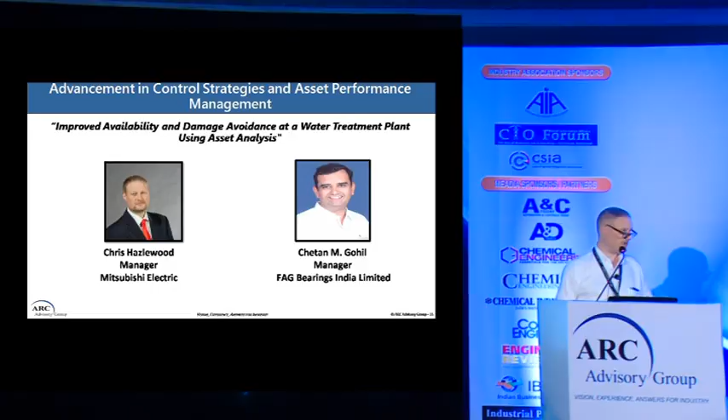So basically, I'm very happy to be here in India. This is the second conference I've attended here. And I have to say, it's one of the most well attended with delegates. So it's a pleasure to be here and to see so many good faces. So let's see if I can work the magic.

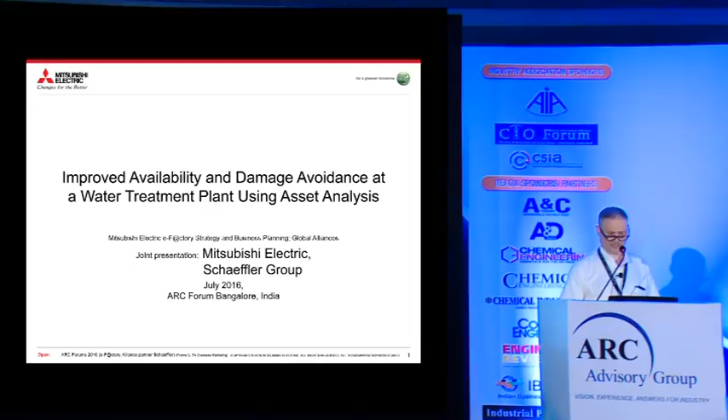Basically, you know probably the name of Mitsubishi. It's famous for cars and Bank of Tokyo and many different things. But Mitsubishi Electric is a specialist in electrical and electronics manufacture. We were established in 1921, and we have a turnover of about 4 trillion yen. So that's quite a bit.

So I want to talk to you, actually this is really nicely following on to the ABB presentation, about what happens when it all goes wrong. When it's been a bad day and you've got your head in your hands and oh no, what's happened? Probably something like this has happened to all of you, or at least your plant managers, when the machine has just stopped working.

And maybe a few minutes before, you had some smoke coming out of the machine, and a few days before that, somebody noticed the machine was getting a little bit warm, but nobody did anything. A little bit sad, really. A while before that, there might have been some noise. You might have heard some strange knocking noise or some squealing where there's a lack of lubrication in the system, and you're thinking, oh, I'll fix that later. But it's already too late.

But actually, you had a warning signal even before then. Way, way back, even weeks and months before, you would have had some invisible warning signs, vibrations. The machine started to do something it shouldn't have. And why was that? Because something you didn't see went wrong with the machine. Because before then, everything was happy. Machine was running great. Production was fantastic.

CMS, Condition Monitoring System. These have been around for a long time, but all this Industry 4.0, IIoT, have actually made CMS become something much more powerful than before. Because we're able to actually bring data in context with the situation and start to understand a little bit more about the real information that we're seeing.

So what kind of inputs come into the CMS system? Well, we have some reactive inputs. We could look at, for example, how many production items we made. So we know something's going to wear out after producing a certain number of items. It could be we're drilling holes with a drill. After 100 holes, we know that the drill is beginning to wear, and the accuracy of the hole is no longer reliable.

It could be that actually we could look at the machine process data for more live information. If we looked at the current on the motor that's driving the drill bit, and we start to see the current increase, we know the drill bit is probably beginning to wear. So we now have two pieces of data we could put together and start to build a picture.

There are, of course, some external factors, such as environmental data, things that are not necessarily under 100% of our control. Temperature, humidity, other factors that we might need to consider. And we have some expert systems, such as a vibration monitor or thermography, or some of these other more high-tech ways of looking at things.

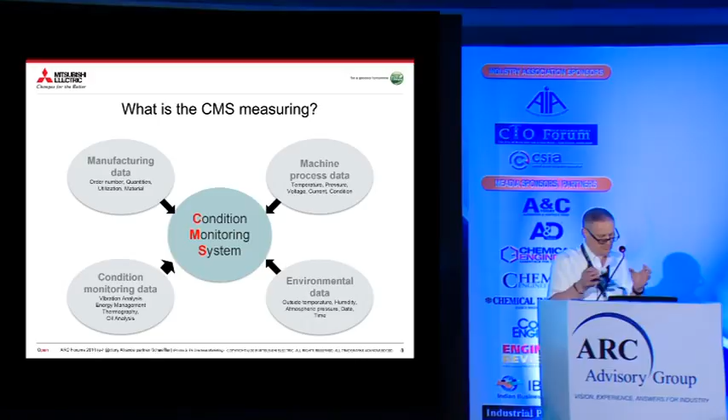So we put all this data together, and we need a way of collecting it and bringing it into a way that we can analyze it and interpret it. So we need an infrastructure. We need a layer of agents and connectivity. Could be networks, it could be just looking at data sets, many different ways, depending on the inputs. So with our classic factory automation, we can be looking with a field bus or with Ethernet. With condition monitoring systems, we may be able to pull data wirelessly, or we may have dedicated protocols to talk.

And we have databases we can pull data sets from and look back over history and see what happened before. There was a mention again in the ABB presentation about experts and historical knowledge. We have stored experts and historical knowledge. And we have that environmental data. We know, for example, with an injection molding machine, we need a longer cooling time if the environmental temperature is higher. So we know our production rate will be slightly slower.

So once we got all the data together, we actually need to put it somewhere. So we put it into a database. And some people say that database is a cloud, and that cloud is remote, or it could be local, or it could be on a machine. Frankly, it doesn't matter. It's a place where you consolidate information, and you review it, and you get answers from it. So that's a basic architecture, a basic overview. It's a preview to what we're going to hear from Schaeffler.

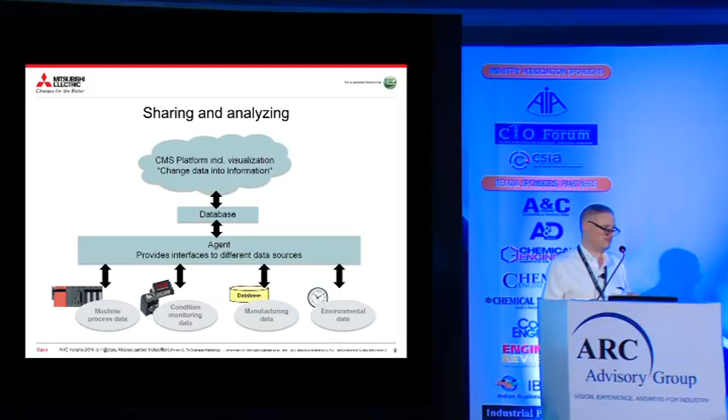We're going to look at 3 different case studies, because one of the things that concerns us is that whenever we hear the discussion of IoT, Industry 4.0, everybody's thinking of big systems, big companies, with SAP, ERP management at the top. But actually, this is equally scalable and important for small companies as well, and small devices. So we're going to start with the first case study, which is actually a water treatment plant. And that water treatment plant is unmanned, and it just has 4 pumps. Very small. It's a device scenario.

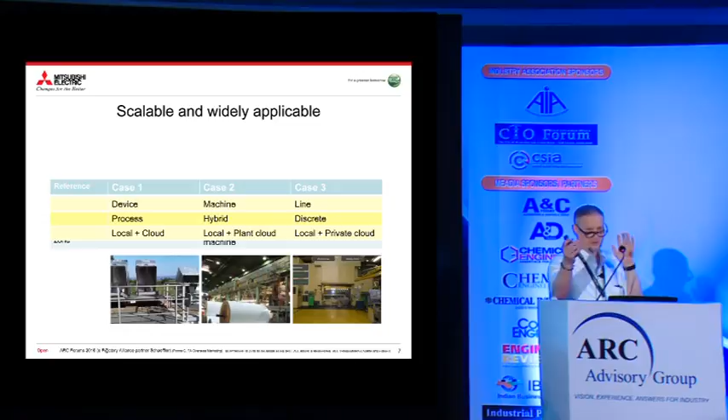The next we're going to look at is a paper mill. And this paper mill is a single machine, but it's huge, 4 stories tall. It's making paper on rolls which weigh about 9,000 kilograms. It's a single machine, but it's a big machine. And then we're going to look at actually a multinational. We're going to look at multi-site, pulling all data together, so completely scalable. And the other way we're going to look at this data is it's not limited to discrete manufacturing. It applies to process, it applies to hybrid, as well as discrete. So it's scalable in a different dimension.

And I wrote here local cloud, plant cloud, and private cloud, because I want you to understand that everything doesn't have to reside in the big WWW. You can still protect your data, you can still control your local information, but you can use those concepts. So I'm going to hand across to my friend Chetan from Schaeffler, who is actually an expert in vibration.

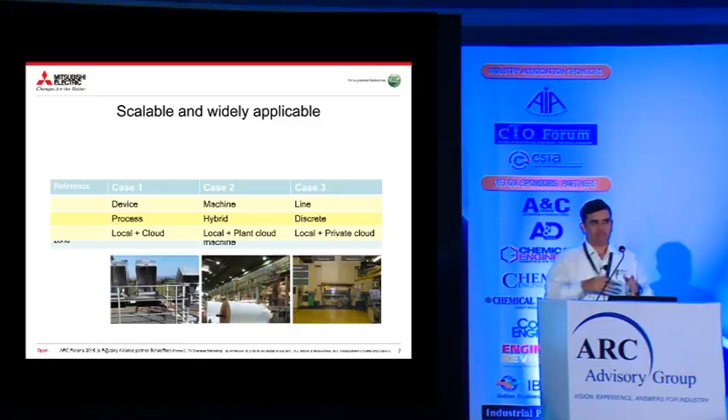So, as described by Mitsubishi, I am Chetan from Schaeffler Group, FAG Bearings. In the beginning of the presentation there was something about Mitsubishi e-Factory, and under that they have many partners, and one of the partners is Schaeffler Group. At Schaeffler Group we have a huge setup, huge understanding, competency for reliability. And after joining hands with Mitsubishi, it's now better and better. So in this forum, we selected 3 cases where, as explained by Chris, we are going to discuss how the condition monitoring will be useful.

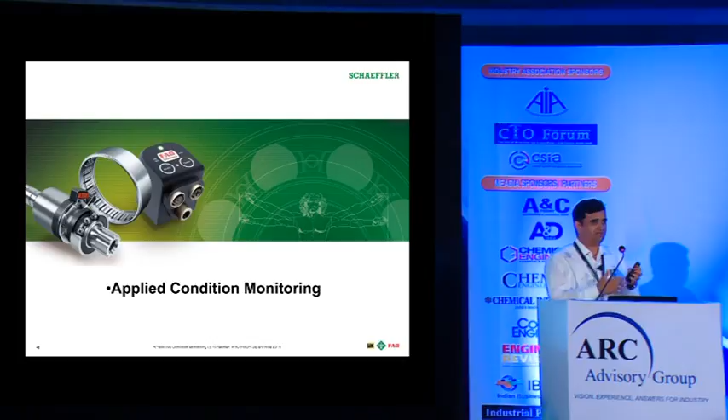So regarding applied condition monitoring, before I start discussing each case, I was just listening to the presentations, and I found 2-3 words very common in many of the presentations. These words are smart. It may be a smart sensor, smart machines. Then intelligent. Another word was connected, interconnected, and obviously cloud. So I am very happy to say that in our presentation many of these things are covered, and it is also mentioned how it is practically implemented in actual life.

So this is about my company, Schaeffler. FAG bearing is a part of Schaeffler, and we have many companies like you can see here, LuK, INA, FAG. These companies you may be familiar with. And in India, the industrial division of Schaeffler has a service unit where we are working on reliability engineering. So let us start with the first one, a wastewater treatment plant. The company is somewhere in Germany, in Rotenburg, and this company is processing water, and that wastewater treatment plant is unmanned because it's very small, and it's not possible that someone can be there permanently.

So here the equipment which was there is pumps. These are screw pumps which you can see over here. These screw pumps transfer slurry, I mean some water and something, from here up to this discharge point. And these screws are being driven by one geared motor, and it works 24/7 continuously. So when the history of this equipment was analyzed, it was going under breakdown with no fixed interval, sometimes within 1 year or sometimes within 3 years. So due to that, time-based maintenance or preventive maintenance was not possible, or rather it was not giving any good result.

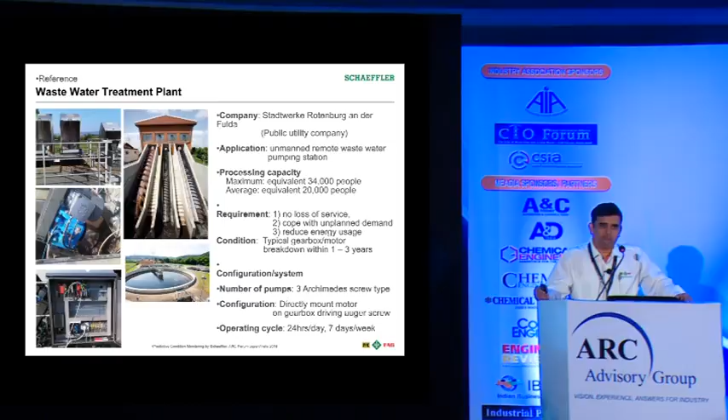If these pumps are not working, it will affect at least 20,000 people in the village. So to improve the reliability of the machine, we installed our sensors. It is Smart Check, FAG Smart Check.

Since this is a compact system, we put one Smart Check per machine. Likewise 3 Smart Checks were there, and all 3 were connected using Ethernet, and this Ethernet was further connected with a Mitsubishi controller and through internet.

This setup is at a field water processing plant, and from here the data are being sent to one central server or central monitoring system where the data are monitored, and in case of any abnormality, it triggers that something is going wrong.

Not only by using a computer, but it was possible to review the data using external devices like laptops or mobiles or any smart device, and we get the information.

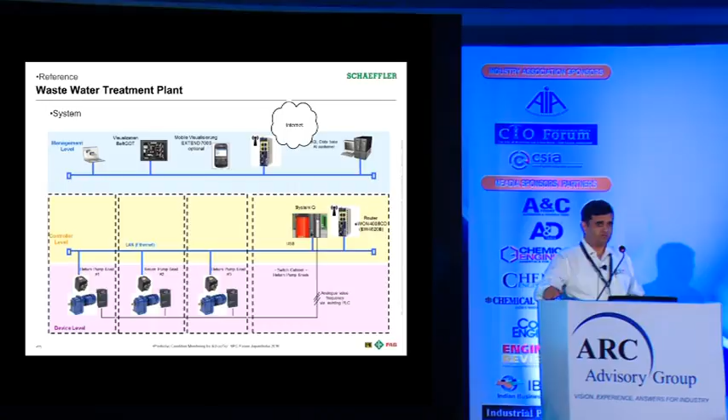After this, the reliability of the system was improved very much, and another thing is all investments are associated with ROI, that is return on investment.

That calculation was also carried out, and the actual scenario was: overall repair of the gearbox was taking at least 1,000 euros, and a new gearbox was 5,500 euros. The solution which was implemented had a cost of 5,700 euros.

So practically, if we avoid one failure or more than one failure, then we get a payback. Initially it was estimated that at least 1 year, or maybe 2 years, or sometimes 3 years, there should be an ROI.

The estimate was identifying more than 2 gearboxes, and if we avoid failure of 2 gearboxes, then the advantage is saving of 3,300 euros, and the main important thing is avoiding 2 failures of the gearbox, which affects 20,000 people.

When this system was installed, within 4 months one defect was identified. People went there, did the maintenance, and the condition was restored.

As Chris said, it's not such a big system with many complexities. It's a very simple system where a local network was created and data were pushed somewhere, and they were getting all the information about the machine.

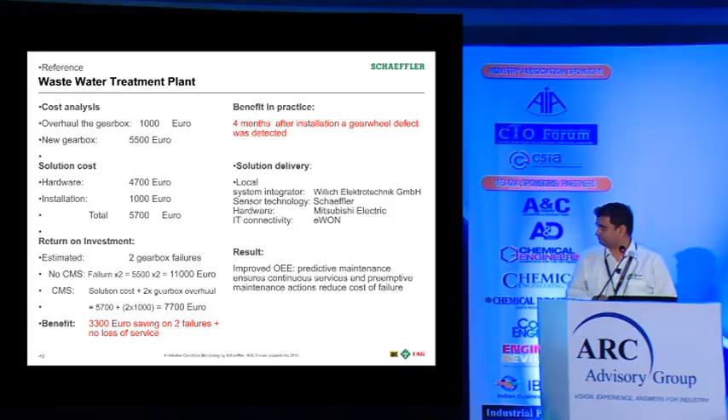This is the second case, regarding Mitsubishi HiTec Paper. This is a paper plant which has a speed of 1730 meters per minute, and this is really a very huge speed. If you convert this into speed, it is 103.8 kilometers per hour.

So you can imagine one high speed car is moving - at this speed, paper is moving in the plant. Since this is a longer high speed, the dryer section of the plant will be longer.

This is about the plant, and here you can see a picture with these people, and it's a 4-story plant. Just to give you understanding of how big the system is and where it will be useful - the target was a total of 26 fans.

Out of 26 fans, 13 are blowers, and the rest 13 were extractors. So these were pushing the air, and the other 13 were taking the air and sending it off.

Here also, if you see, in case of breakdown of any fan or blower, the paper will not be able to get dried to the required level, and that will give stoppage to production, and sometimes the entire paper roll will go into scrap. So it's a big loss of money as well as production opportunity.

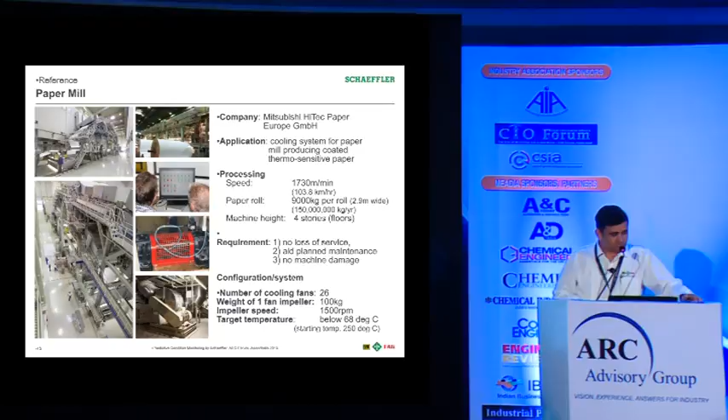Here the system required was a little bit different than what we saw earlier. We installed 26 Smart Checks, so 13 on blowers and other 13 on extractors, and all these Smart Checks are connected on site using PoEs.

That is power over Ethernet. PoEs help you reduce the cabling work - you don't have to make some connection for power and some connection for data. No, a single cable will take care of everything.

This system was connected with a central system by Ethernet cable, simple and entire. By doing this communication, all the Smart Checks were available in the same network, and from any centralized PC, using FAG SmartVisu, we can see what is happening with which fan.

So the condition of the fan will become red, yellow, or green. It's very easy for the operator - just see the condition yellow, then ask some maintenance guy to attend it, and he has to see that it once again regains from yellow to green.

So overall setup was like this. Another beauty here is there was one installation of a smart controller from Mitsubishi, and this system can communicate with the existing controlling system. So all these sensors are getting information about the plant operating condition through this channel.

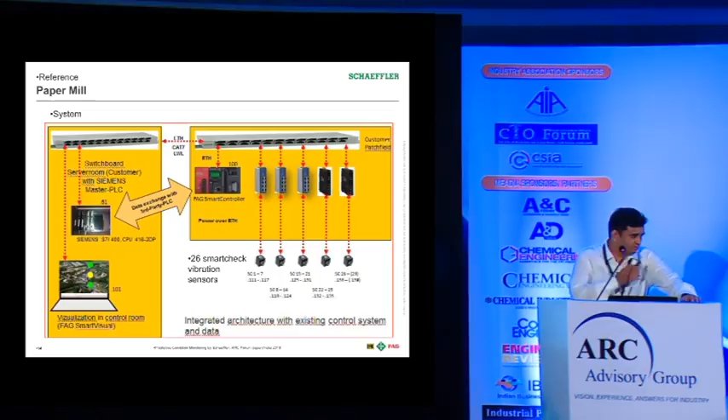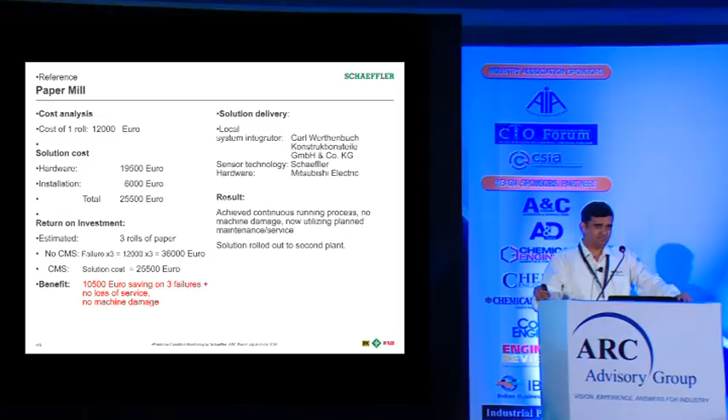When this was installed, some statistics are there. The cost of one roll is 12,000 euros, and the cost of the complete 26 sensor setup was 25,500 euros. Ideally, more than 2 identifications of damage will give the payback, and apart from this, more than 10,000 euros of saving was there. But in overall, the key point or the information about the system is...

If an existing system is there and we want to make the equipment smart and interactive, then it's not so difficult. Just put some small sensors, connect them with a processor, and it is possible to achieve.

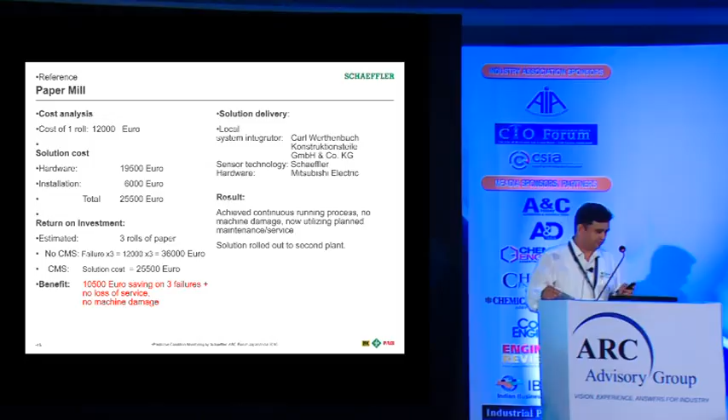This is a little bit more complex than what we saw earlier. The third one is even more complex. That's our own example, because we also believe and agree that condition monitoring or reliability based maintenance is very necessary in all fields, whether it's production or continuous operation or whatsoever.

At FAG Germany, we have a manufacturing plant, and in this plant some data are there, like 77,000 square meter workspace, more than 3,500 employees work round the clock. That indicates how big the plant is.

So here we decided to implement a completely predictive maintenance concept. That will help us not just identify the bearing or machine condition, but it will also help us maintain production quality.

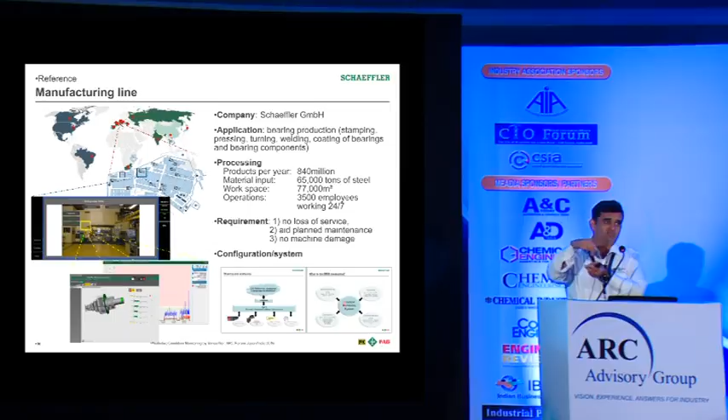Like in one example from Chris, it was mentioned that if a drill machine makes, say, 100 drills, then we have to change the drill bit. If it is not changed, it will give high vibration, which gives additional forces on bearings, so the bearing will deteriorate, and the production this drill is doing will not be up to the required quality. So vibration can help not only in manufacturing process but in production process as well.

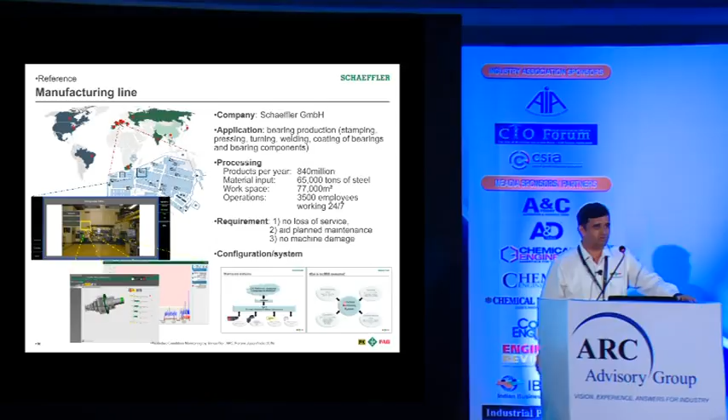So here once again the thing is a little bit different from what we saw earlier. Here we have put smart checks on machines, and this smart check will have different kinds of inputs.

One possibility is by TCP/IP connection, one possibility is by analog inputs - say some signals are not available, it can simply pick up any 4 to 20 milliampere signal and be fitted with smart check. Sometimes we have a digital switch box from Schaeffler, and this switch box can handle many data plus power and everything. So everything was combined at field level.

At controller level, we have storage facilities, some controlling system from Mitsubishi, communication, and also clouding. So this is what we do with the processed data. At the upper level it is MES - manufacturing execution system - by means of SCADA and FAG SmartWeb.

This takes care of monitoring all the machines, and then it is connected to ERP level, meaning SAP. So here the overall system is, in case of any abnormality, the complete process can trigger a work order, and that work order defines what is the problem with the machine - unbalanced or misalignment or whatsoever - and that will generate one work order that the maintenance department has to execute.

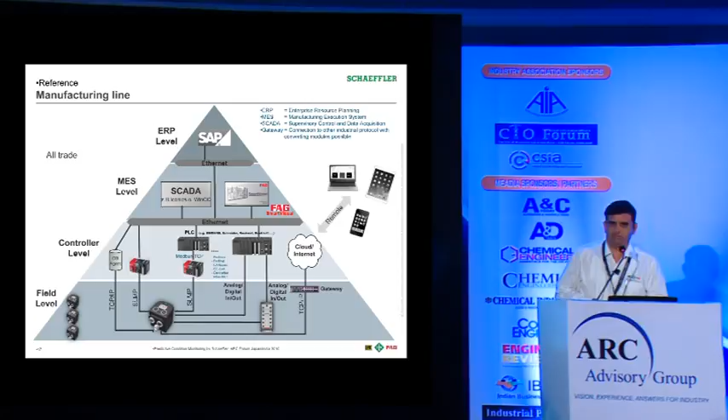So this is the full-fledged system, how it works. The advantage is really priceless, because you can understand, if a bearing is not up to the mark and it goes to site, and it's not performing, then that will give deterioration in the brand image, as well as the cost to replace this bearing is very, very huge. It's not a cost to us, maybe it's a cost to the customer, but ultimately it is a cost. So the reliable process it gave is really priceless.

And now we are going to implement this kind of predictive maintenance program all over the world, and even in India we have already implemented it in all our 3 plants - LuK, INA and FAG.

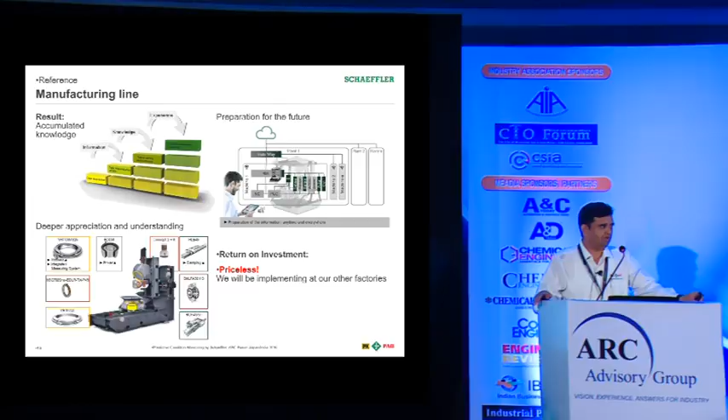So about the future - this interesting system is what we can say is a small representation of Industry 4.0. Here you can see in this machine or gearbox, we have a DTECT X1, which is once again a vibration monitoring system. We have a lube oil monitoring system, and we have some auto lubricators also.

When this system is running, it will measure vibration, measure the parameters, and feed it to the cloud, so anyone from anywhere can see the data. And the beauty of the system is, in case of the instrument, it's a smart instrument - it understands what the vibrations are from.

Going to the next level, all this machine data can be fed to one of our software, BEARINX. It identifies what forces are on the bearing and how much time it has already run, and based on that calculates the remaining life of the bearing on a continuous basis. It gives feedback that the bearing at this location has already run to 65% or 75% of its life, like the presentation in ABB. So yes, a similar system is also in place in Germany.

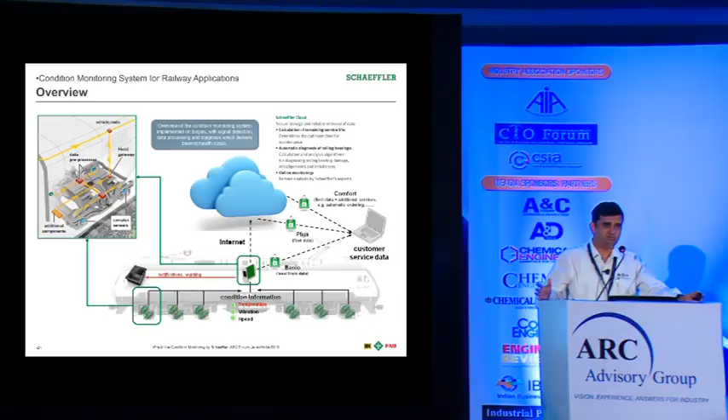Lastly, everything we discussed is related to a fixed plant or setup, like a plant or machinery. But such a system is also possible in moving machines like trains. Japan is very famous for high speed trains, so we have installed smart checks in trains there to monitor the condition of bearings of the wagon. Since it's moving, cloud connectivity is a must, and in case of any abnormality we get information through the cloud at a monitoring center, so they can take preventive action and the wagon does not see any unplanned or online failure.

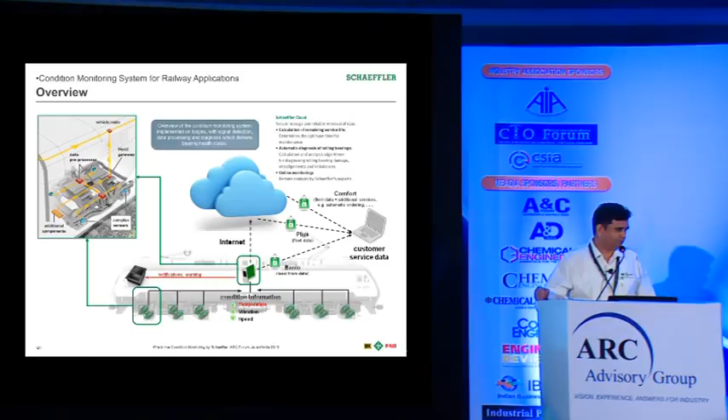So that is from my side regarding the 3 case studies. I will request Mr. Chris once again to...

Okay, thank you for that, Chetan. I just wanted to come back and say a few words at the end, because what we wanted to do today was show you not the concept of Industry 4.0 or IIoT, but show you the reality. We're not talking about theory, not about what might happen in 1 year or 6 months or even 2 or 5 years' time. We're talking about what's happening now, what's possible now, what you can implement by yourself with small steps. It doesn't have to be an all or nothing experience.

One of the key points is this: the word collaboration was mentioned several times earlier today, probably meant between systems. But there's also collaboration between partners to help implement systems. And if those partners have lots of experience—for us, our concept has been running since 2003—this is well established and well proven because we're using it in our own factories as well.

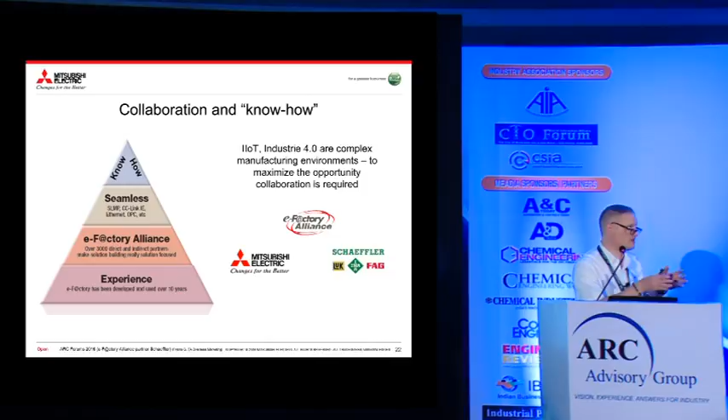So yes, we need open and seamless systems, and we need good partners to actually deliver that. And we're not the only ones—there are plenty of good partners here today, and you can see them in their own exhibition area as well. So I definitely encourage you to speak to people, because there are lots of people with know-how. And sometimes the companies with know-how aren't always the biggest companies. There was a presentation about startup companies and innovation and coming up with new ways of doing things. We shouldn't ignore them—they are very much helpful for tomorrow.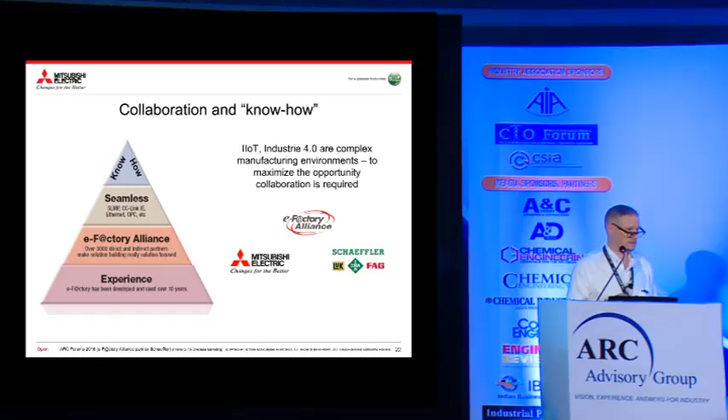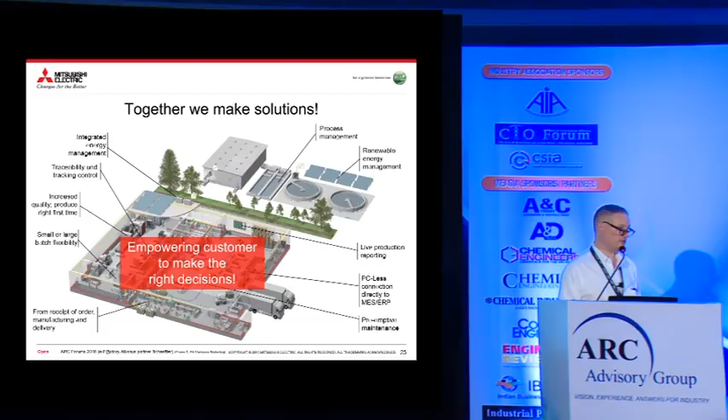So these concepts are complex, but with small steps we can actually make them realities. In Japan, we call this Kaizen. This Kaizen process empowers you to make the solutions for the future. We talked about preemptive maintenance today, but there are other areas you'll be thinking about, and you won't be thinking about technology—you'll be thinking about your business need: I need to track and trace, I need to manage my renewable energy resources balanced with my standard energy consumption. So we're on the edge of a very exciting future. What a great time to be in manufacturing. Thank you very much.